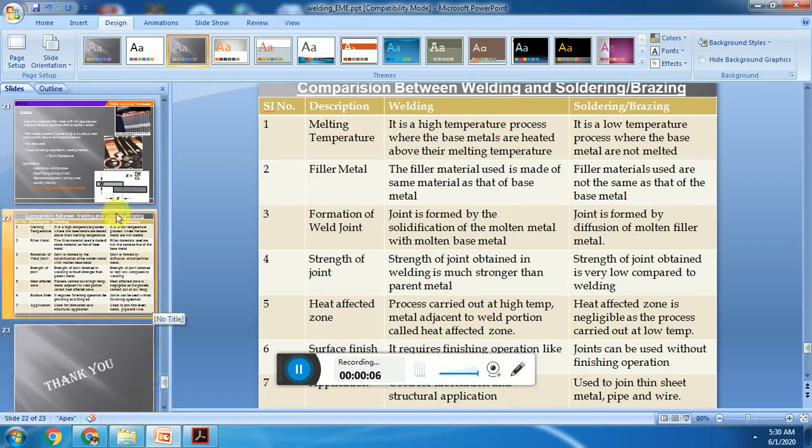In this lecture video, we'll discuss welding, soldering and brazing. These three processes are metal joining processes. Here, welding is a process which produces almost a permanent joint, which is as good as a single component. When two materials are joined by the welding process, it will form a permanent joint.

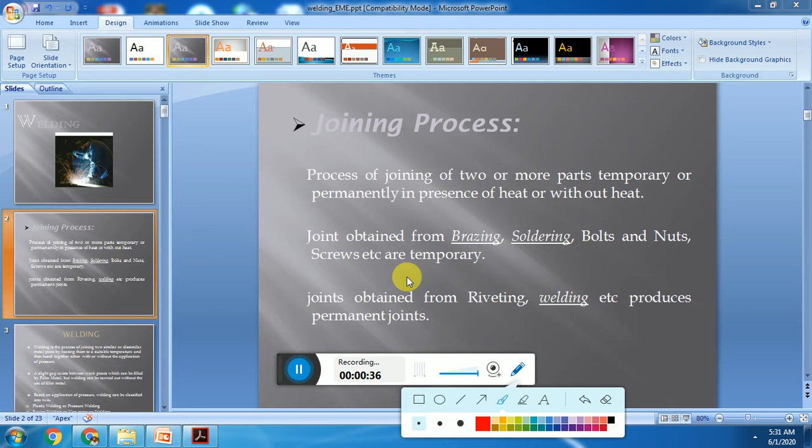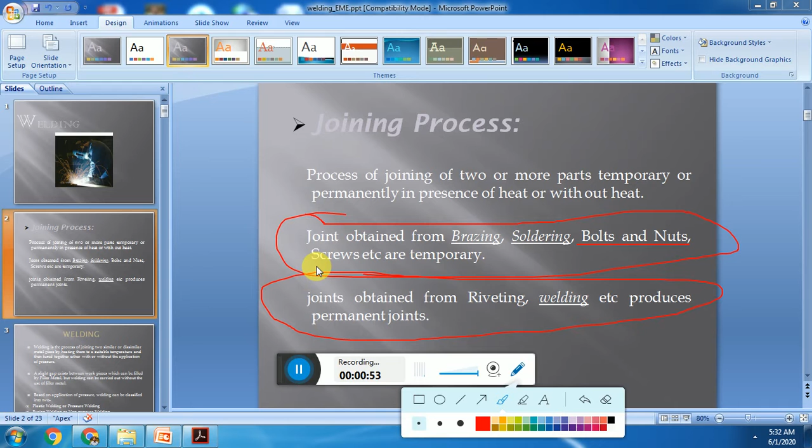Welding is a process of joining two dissimilar or similar metal pieces by heating them to a suitable temperature and then fusing them together with or without application of pressure. It means welding is a process in which the two metal pieces which are to be joined are heated and then joined with or without pressure.

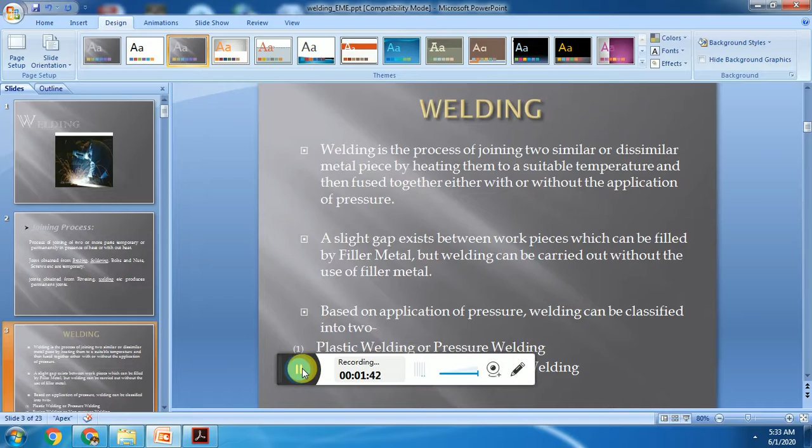A slight gap that exists between the workpieces can be filled by a material called filler material, but welding can be carried out with or without filler material also. Welding can be classified as pressure welding, or resistance welding, and non-pressure welding like arc welding and gas welding. In pressure welding mainly pressure is used.

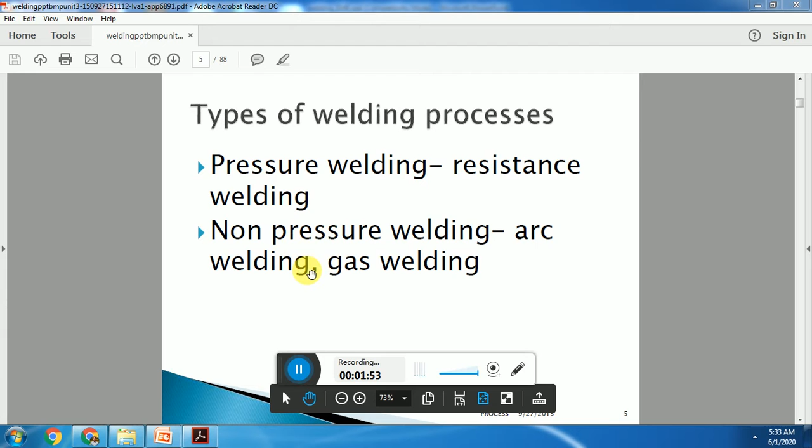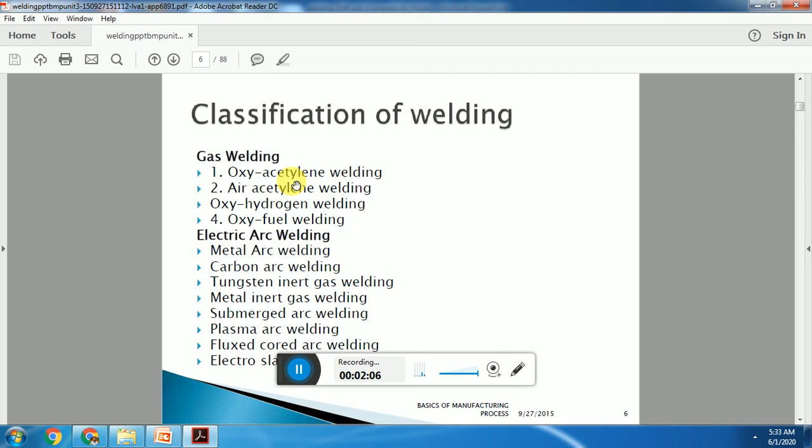It can be classified like this also: gas welding, oxyacetylene welding, arc welding. We'll discuss oxyacetylene welding and metal arc welding here further. Spot welding: these are the different types of welding processes, meaning the different types of metal joining processes.

Welding types based on the source. If we take arc welding, an electric arc is the source for the arc welding. If we take gas welding, gas is the source. If we take resistance welding... these are the welding types and these are the sources of heat.

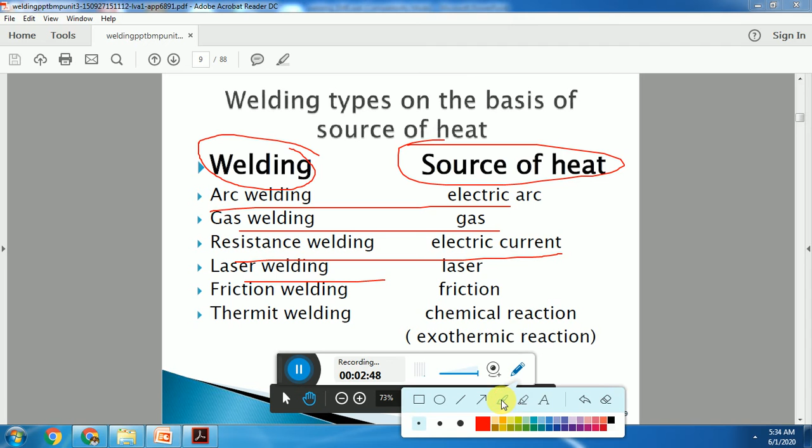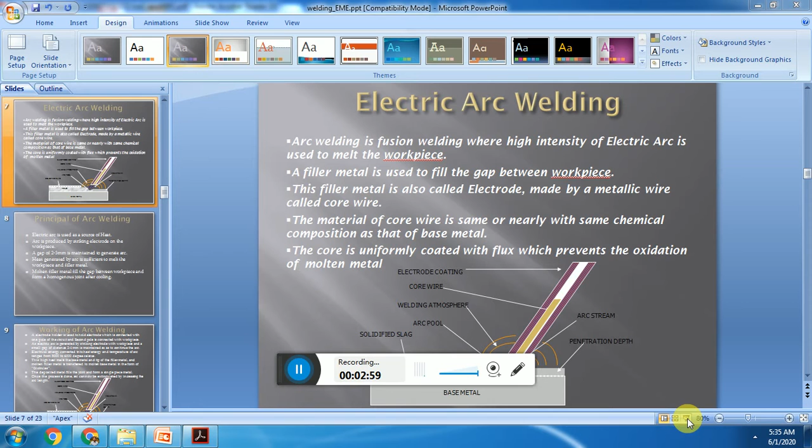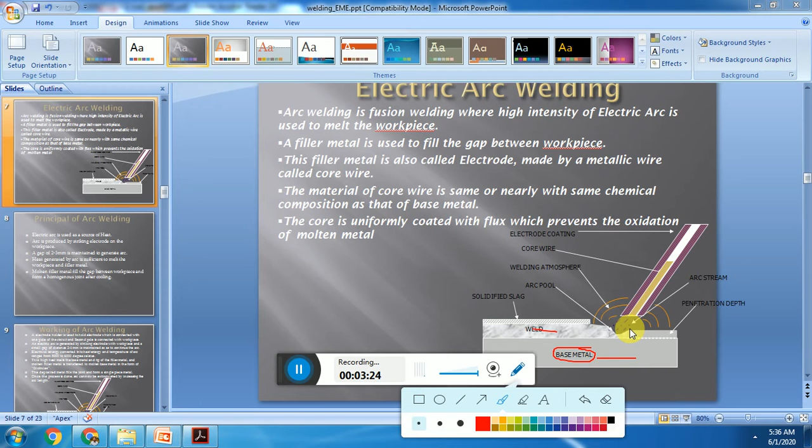We will discuss a type of welding called arc welding. In arc welding, if these are the two materials which are to be joined, this is one material, this is the second material to be joined. One material is the base material. Here an electric arc is used. Electric arc means there will be a filler material.

The electric arc is produced when the filler metal is initially stuck to the base metal and then released, and a 2 mm gap is maintained there. An electric arc is produced and a good amount of heat is produced so that it will melt and the two metals will join. Here this is a base metal.

Suppose we want to join this metal here, the base metal. This is the electrode with a core wire and a flux coating. There will be a core wire. Filler metal is also called an electrode. Initially this electrode is struck to the base metal and after that a small gap is left.

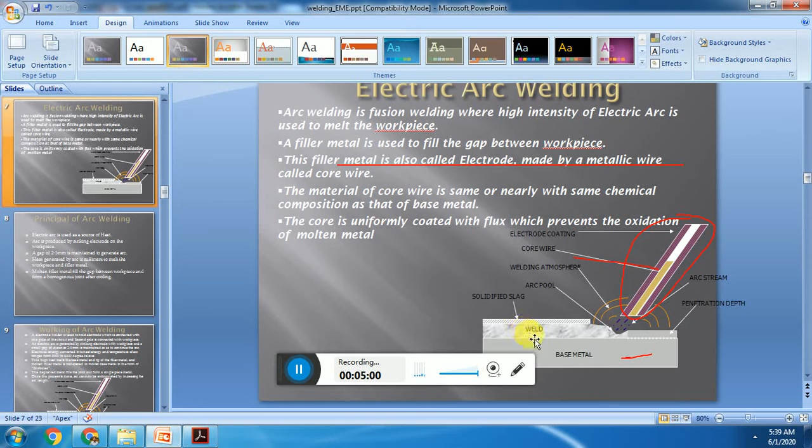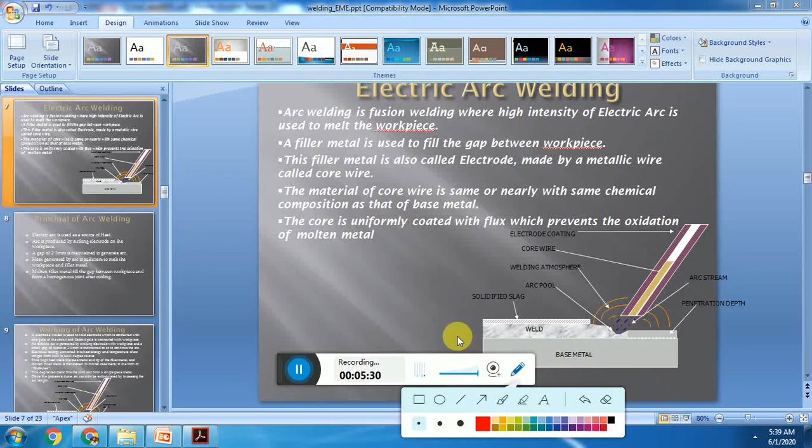Suppose these are the two metals to be joined: this is one metal and this is another. Initially this electrode is struck, and after that a 2 mm gap is maintained so that an electric arc is developed and heat is produced there. Due to that heat, the metals will melt and they will join. This is the principle of arc welding.

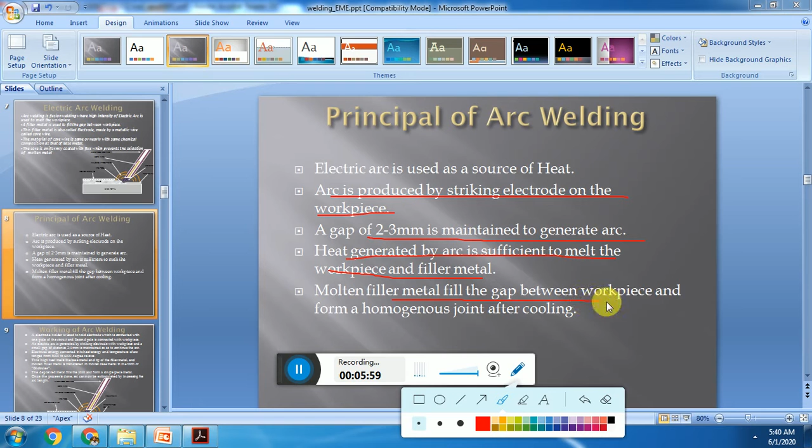Electric arc is the source of heat. Electric arc is produced by striking the electrode to the workpiece. A gap of 2 mm to 3 mm is maintained to generate the electric arc. Heat generated by the arc is sufficient to melt the workpiece and the filler material. Molten filler material fills the gap between the workpieces and a homogeneous joint is produced after cooling. This is one of the processes, called electric arc welding.

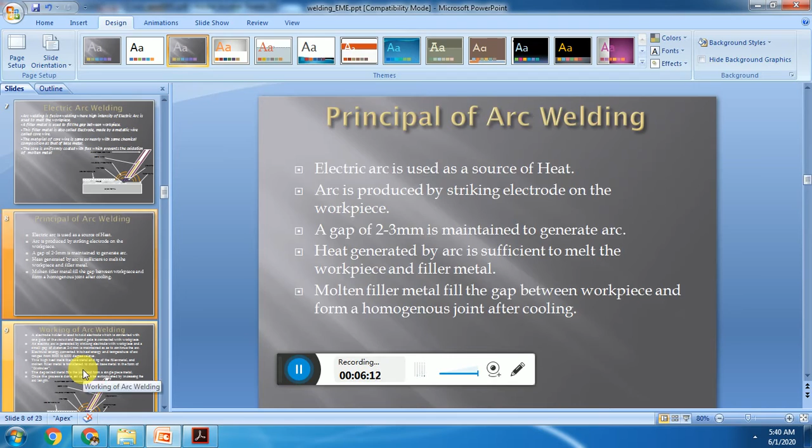Working: in electric arc welding, an electrode is used, which is connected with the pole. The electric arc is generated by striking the electrode with the workpiece, and after that a 2 mm to 4 mm distance is maintained. Electrical energy is converted to heat energy, and a temperature of 5000 to 6000 degrees Celsius is generated there.

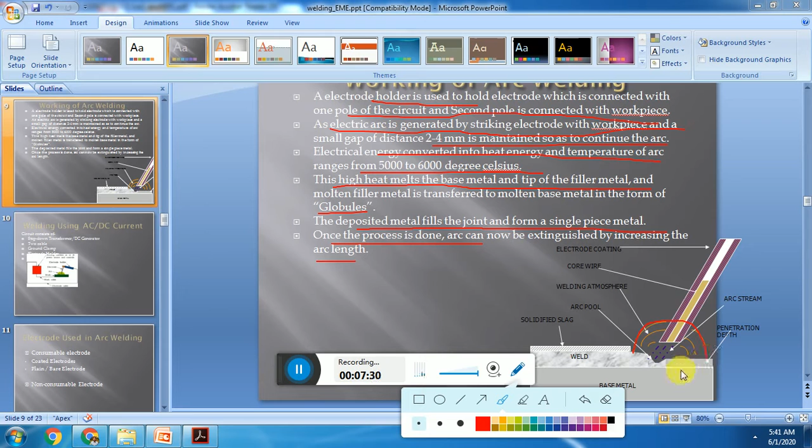The heat that is produced will melt the filler materials. Molten filler metal is transferred to the molten base metal in the form of globules. The deposited metal fills the joint and forms a single piece. Once the process is done, the arc can be extinguished by increasing the length. If the distance between the electrode and the workpiece is increased, the arc will reduce. This is electric arc welding.

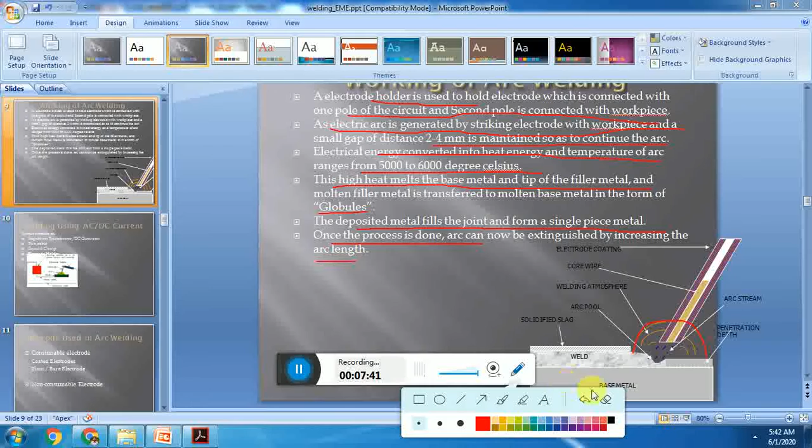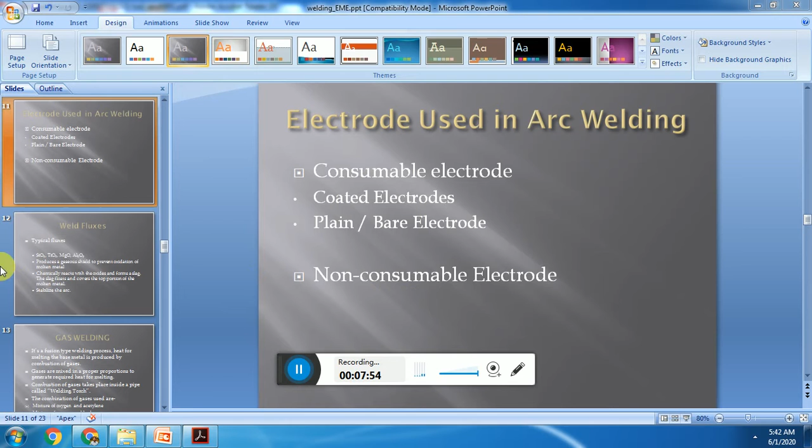The electrode used in electric arc welding may be a consumable electrode or a non-consumable electrode, and the flux which is used there is used to prevent oxidation. Flux is used to prevent oxidation, and it is made up of SiO2, TiO2, MgO, Al2O3.

Chemically it reacts with the oxides and forms a slag. The slag floats and covers the top portion of the molten material and stabilizes the arc. It reduces the oxidation. A flux is used in the electrode which will reduce the oxidation. If oxidation is produced there, then it will reduce the temperature. Therefore, to reduce the oxidation, a flux is used.

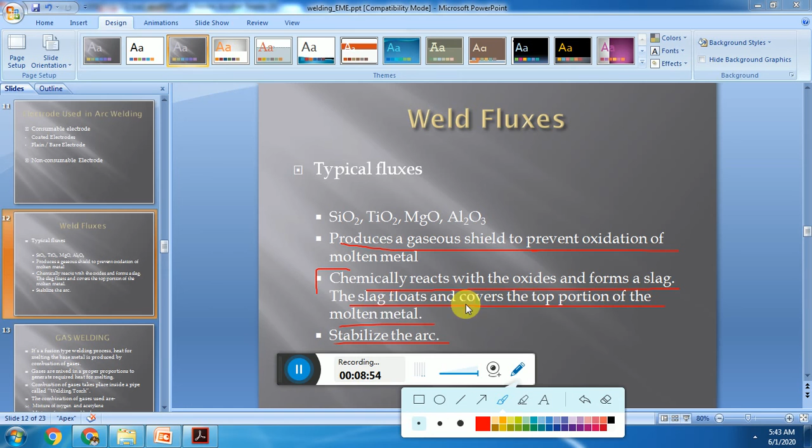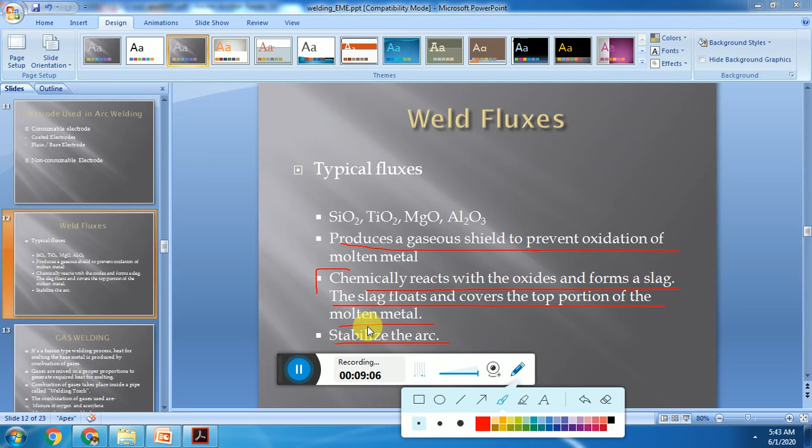How it acts is, chemically it produces a slag, and that floats over the top portion of the molten metal and prevents the oxidation of the molten metal.

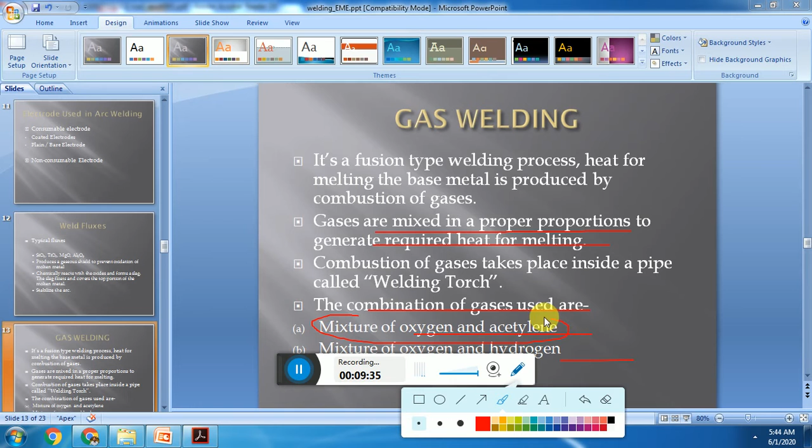Another type of welding process is gas welding. In gas welding, a gas torch is used. In gas welding, gases are mixed in a proper proportion and the required heat is generated. The combination of gases may be oxygen and acetylene or oxygen and hydrogen. If oxygen and acetylene are used, that type of welding is called oxyacetylene welding.

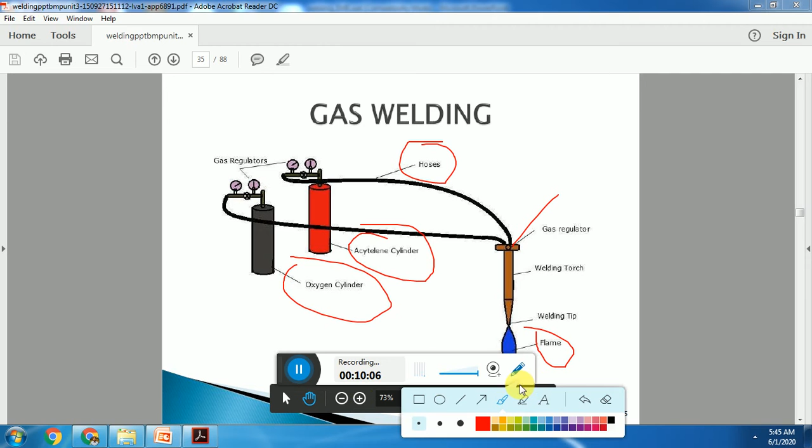This is the diagram for oxyacetylene welding. This is the oxygen cylinder; oxygen and acetylene are mixed in proper proportion, and a flame is produced. The flame which is produced here will melt the welded portions, meaning it will melt the metals to be welded.

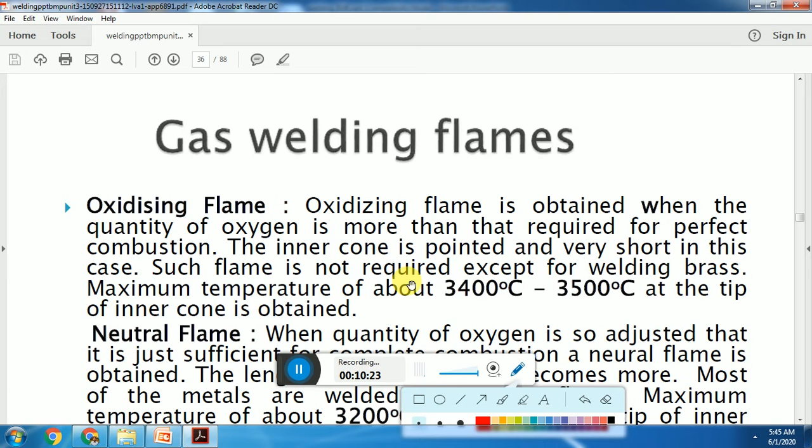For oxyacetylene welding, the flame that is produced after burning oxygen and acetylene can be classified in different ways, like this. Either it may be a neutral flame, an oxidizing flame, or a reducing flame. Oxyacetylene welding flames are classified like this.

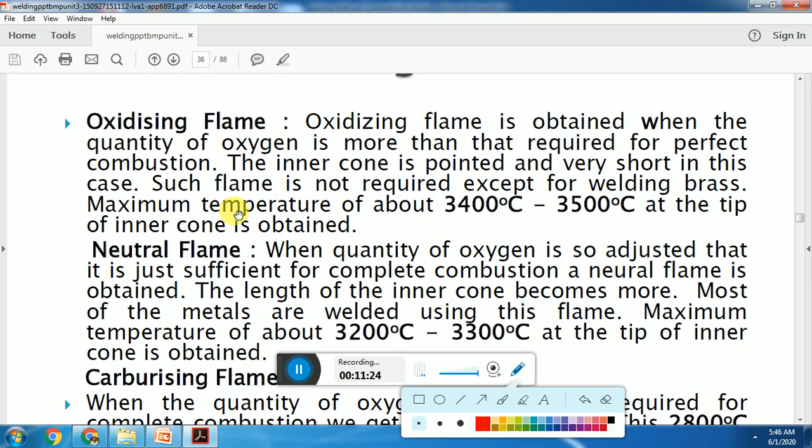An oxidizing flame is obtained when the quantity of oxygen is more than required for perfect combustion. When the quantity of oxygen is more, an oxidizing flame is produced. The inner cone is pointed and very short in this. An oxidizing flame is not required except for brass. Maximum temperature is 3400 to 3500 degrees Celsius here. This is an oxidizing flame.

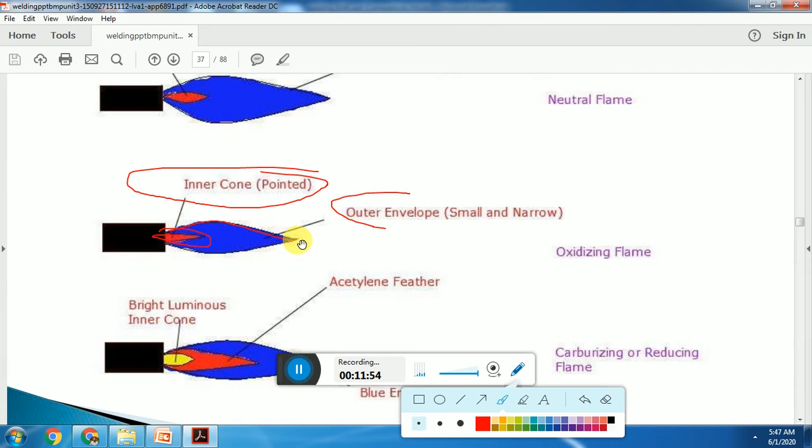In an oxidizing flame, the inner cone is pointed. We can see here the inner cone; it is pointed, and the temperature is 3400 to 3500 degrees Celsius, and the outer envelope is small and narrow. This outer envelope is small and narrow for an oxidizing flame, when oxygen is more and acetylene is less.

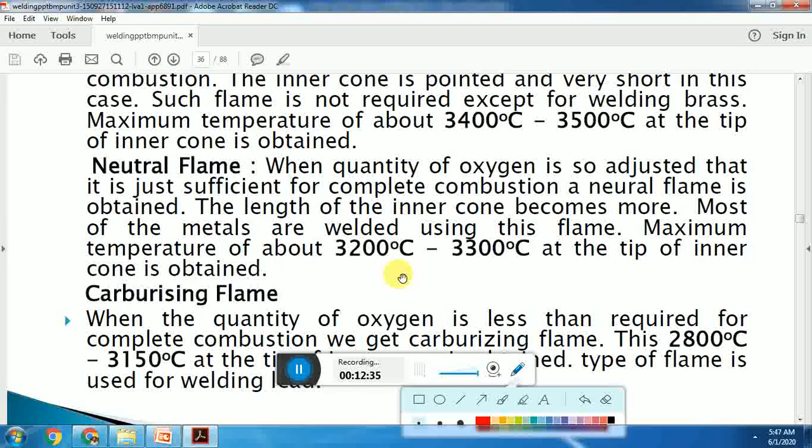The next one is the neutral flame. When the quantity of oxygen is adjusted so that it is just sufficient to complete combustion, a neutral flame is produced. The length of the inner cone becomes more. When oxygen and acetylene are mixed properly so that acetylene is burned properly, the flame produced is a neutral flame. Here the inner cone temperature will be about 3300 degrees Celsius. Here the inner cone is not pointed.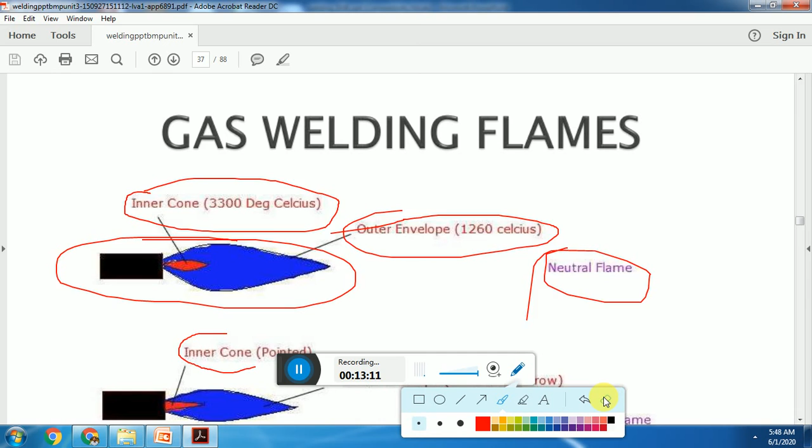In the oxidizing flame, the inner core is pointed. Here is the envelope; this is a neutral flame. A neutral flame will be like this. And this is an oxidizing flame, neutral flame, oxidizing flame, and the third one is a reducing flame.

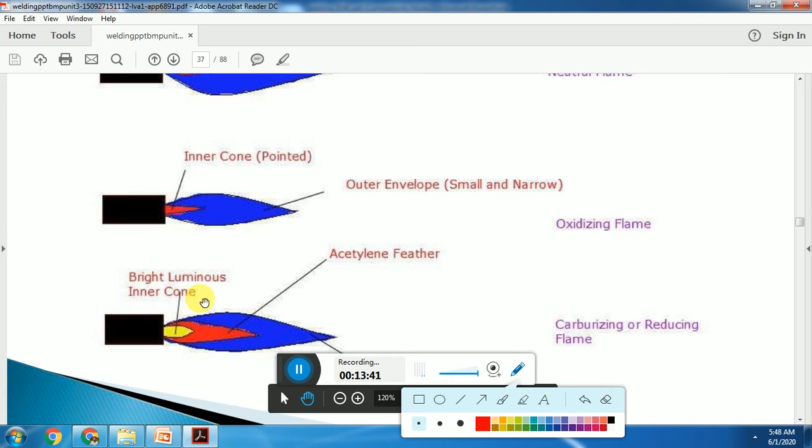Reducing flame means acetylene is more. If acetylene is more, then a reducing flame will be formed. There will be a bright luminous inner core. The reducing flame is also called a carburizing flame.

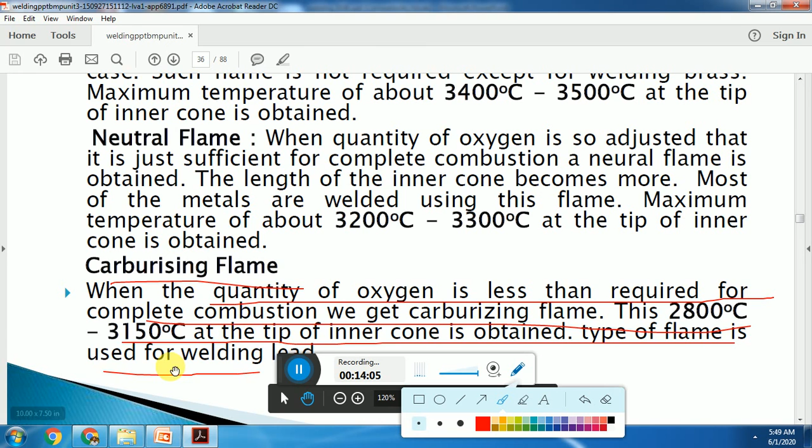When the quantity of oxygen is less than required, it will produce a carburizing flame, and the temperature is about 2800 to 3150 degrees Celsius for this one. This is a reducing flame, also called a carburizing flame. These are the three types of flames that are produced in oxyacetylene welding.